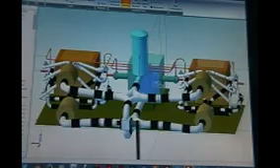This is my self-propelled motor. This is how it works, and I'm going to try to explain the statics and why it works.

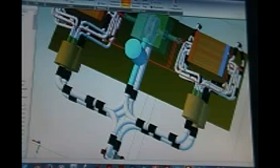Inside this orange box there are meshing gear teeth, a planetary gear system. You see the pink gear in there is the center gear, and over here in this blue box there's an impeller. You can see it has blade vanes in it.

The meshing gear teeth are between 4 and 8 times the volume of the impeller blade vanes, once around, and

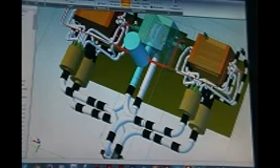as the impeller goes around once, and you close this valve here a little bit at a time, the amount of volume that comes out of the meshing gear teeth increases, and it runs on suction, so it sucks the hydraulic fluid out of the reservoir as the meshing gear teeth continuously pumps fluid up to the reservoir at the same time.

And since there's more volume in the meshing gear teeth, and this goes around once, you close the valve and more volume goes around the impeller than the impeller goes around.

So that creates an aerodynamic force on the impeller blade vanes, creating a torque. You close the valve more and it increases the volume going around the impeller blade vanes.

Once, twice, up to, since this is approximately 8 times, it can go around 8 times with the valve fully closed when the impeller goes around once.

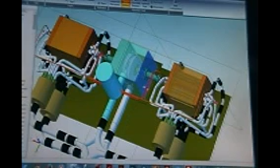So that's a mathematical formula that I'm not going to get into here, but in the torque ratio, if you did close the valve all the way and this was 8 times the impeller volume,

So you have to open the valve to keep it from accelerating. There's torque there.

The head force, even if you add the head force, there isn't much head force because it just fills the reservoir. But if you add the head force as if it were 8, it'd be 16, and still that's 16 is not equal to 48,

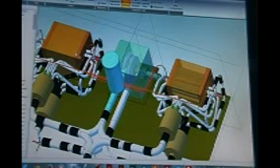and half is over here and half is over here, so they add and equal 8, so it'd be 4 and 4 for each one, so it's still 8.

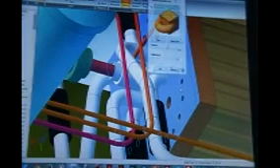The areas, the port areas, let me see if I can show you the port areas. No, it doesn't look like I can.

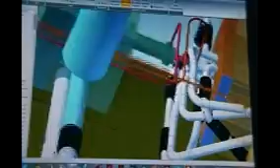Well, there are port areas in there, and the sum of the port areas was 3 of them over here and 3 of them over here on this plate, where the suction hydraulic fluid draws against this area plus this area, where these ports go through here to the impeller.

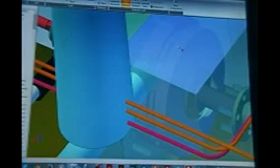There's a ratio there that I can multiply into the equation on the suction part and try to make it greater than 48, and it still doesn't come out greater than 48, and I still get rotation.

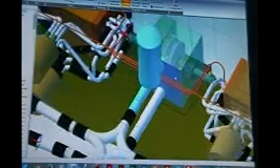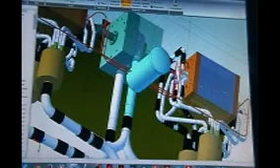And I can make this impeller blade vane bigger and accommodate a bigger port area equal to the area of the sum of the ports in the meshing gear teeth, and make the meshing gear teeth longer in order to get the right ratio of 4 or however many, 6 or 5 or whatever I want.

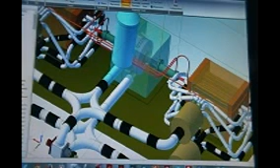And that way the port areas will be equal and keep the radius the same, and eliminate that multiplier and keep the torque ratio the same. And I keep getting torque.

I have been able to eliminate every prospect of what would make this motor not work. I can't seem to make it not work.

I eliminated the pressure on the flow by dropping the areas of the lines as these small tubes come in. I increase the area to the sum of the areas, and except right here where the two come in here, I didn't double the area here, so it goes a little fast through here.

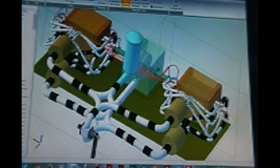The hydraulic fluid suctions, the head force comes in here and it suctions down here when the valve is open. That's off. All the hydraulic fluid suctions down through here and goes back.

And here's the crank. Here's how you start it. This is the crank. You stick a crank in here and you crank clockwise. And then you close the valve a little bit and a little bit more, and it should begin turning.

But since I only have a CAD model, that's all I can tell you. But there should be a sweet spot in there where it'll idle.

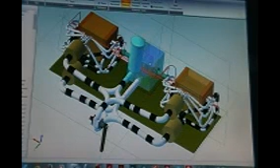Part of the hydraulic fluid will flow this way and part of it will flow to the impeller. But the meshing gears will still be producing 1, but since part of the hydraulic fluid will be flowing back, since the valve will only be partially open, this would be putting out 1, this will be putting out 1/8 suction, because 7/8 of the force will be flowing through the valve.

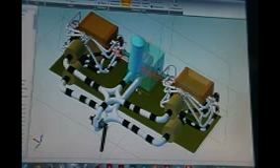And that would actually be stopped too, because you have to have a little extra force to overcome friction. So you'd want to close the valve just a little more. There'd be a sweet spot in there somewhere where it'll idle. But that's pretty much it.